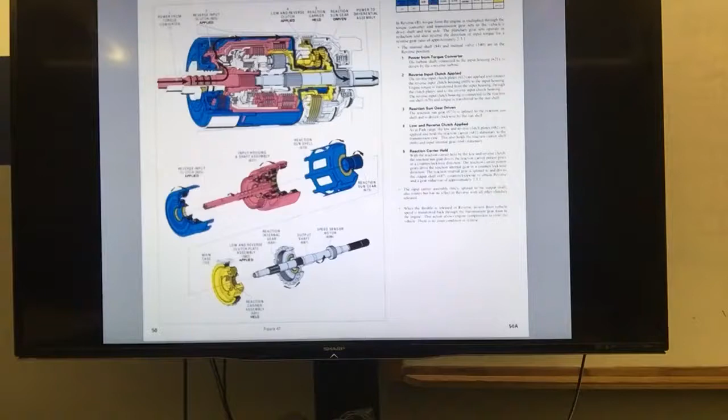So let's put it in reverse. We've moved the manual valve from park through neutral to reverse, and when we did that, we allowed our fluid pressure.

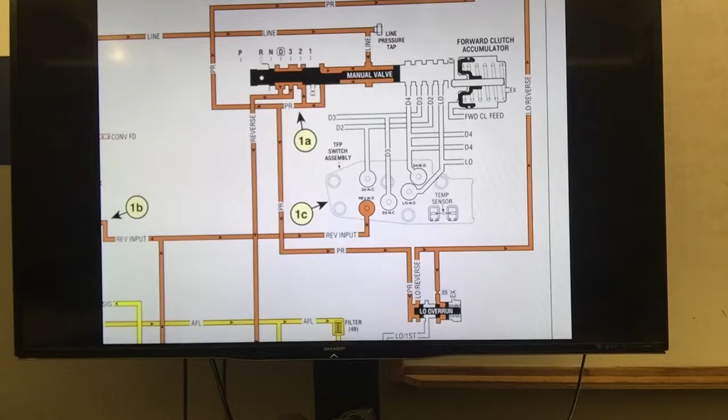PR fluid was already filled, remember, so our low reverse clutch was already applied. That's the one up here in the case. We already have that applied. That was applied in park.

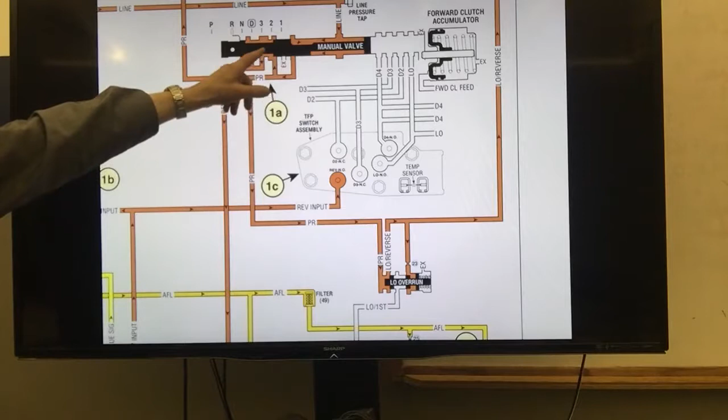When we moved our manual valve over to reverse, indicated by the indicator going over to R, we allowed some of our PR fluid, which is at line pressure because they're all connected together, so it's at whatever line pressure is, which is why the fluid is red still. That goes into our reverse fluid passage.

If you follow reverse fluid, it goes down to the reverse abuse valve, which is seated, spring-loaded in the closed position, so fluid doesn't go past the reverse abuse valve.

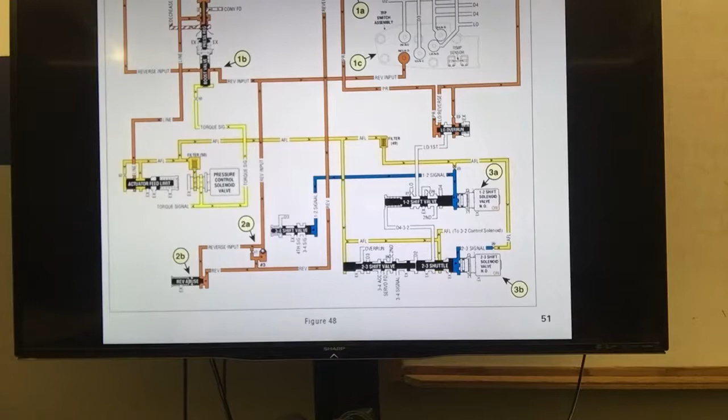It instead goes up to that number 3 check ball you see right there. This check ball is going to seat, so the fluid flows through the number 17 orifice, which slows down the buildup of pressure, and it goes up to our boost valve. What does that do to line pressure? It raises our line pressure because it blocks off the flow into the decrease passage.

We send a little over to our pressure switch assembly to change the state of that hydraulic switch. That switch is normally open, that's what NO means. So when we pressurize it, we close it to ground. The PCM is sending a voltage out on that circuit, and it's going to see the voltage get pulled low. That's how it knows we're in reverse.

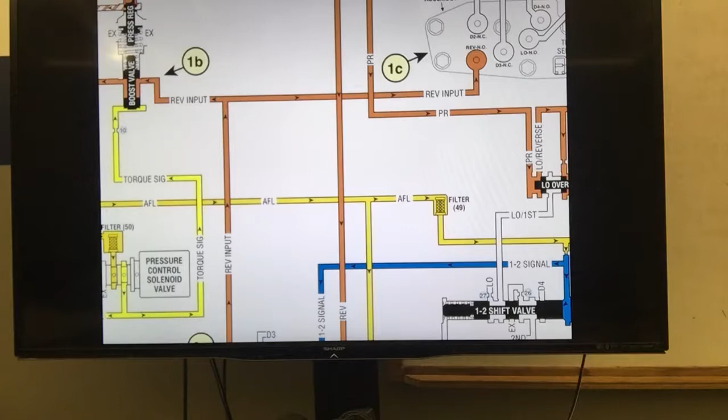We went through our boost valve to boost up our pressure, and then went on up to apply our reverse input clutch. Notice the exhaust, the captured check ball right up here. What's that for? Bleed air out, that's all it is.

And that's usually going to be located in the pump. So when you guys take a look at your pumps, you're going to see these little captured bleed holes or check balls that allow air to bleed.

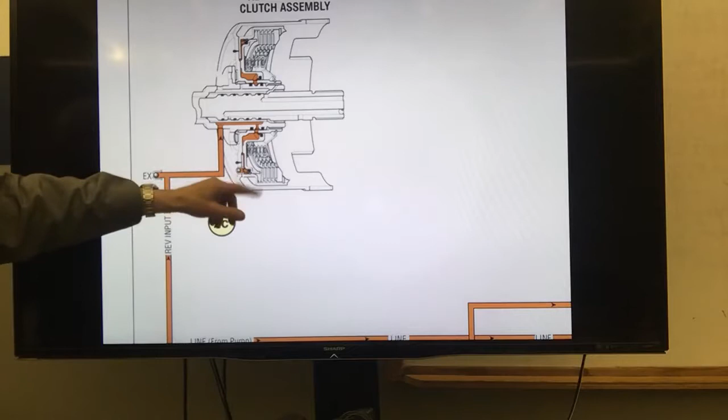And then we go over to our reverse input clutch housing where we can apply our reverse input clutches. That check ball is going to seat. That check ball is there to release any residual pressure when we release the clutch.

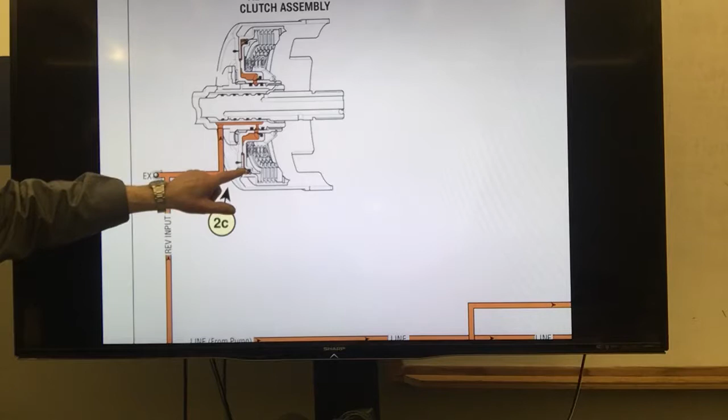Because this thing is rotating with the input shaft and housing assembly, fluid that remains in there after we release the clutch would get thrown out through centrifugal force and partially apply the clutch, which would lead to burning up the clutch over time. That keeps that from happening.

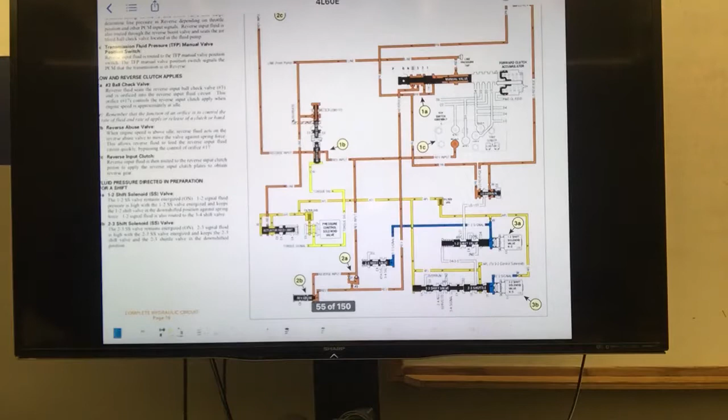Are the solenoids used? Do we need these solenoids? No. Reverse is hydraulically achieved. That's why it's so, reverse boost power. Yeah.

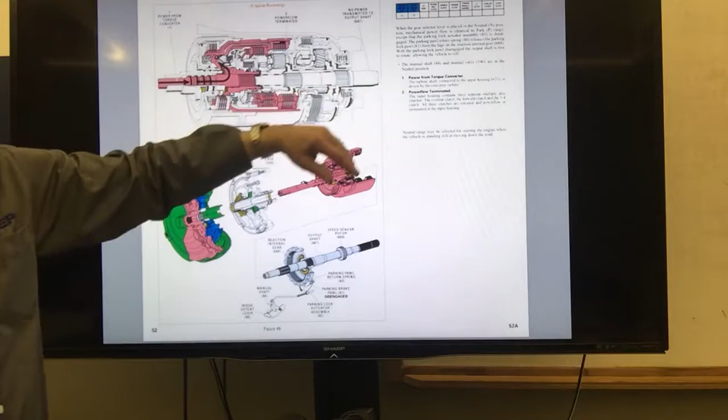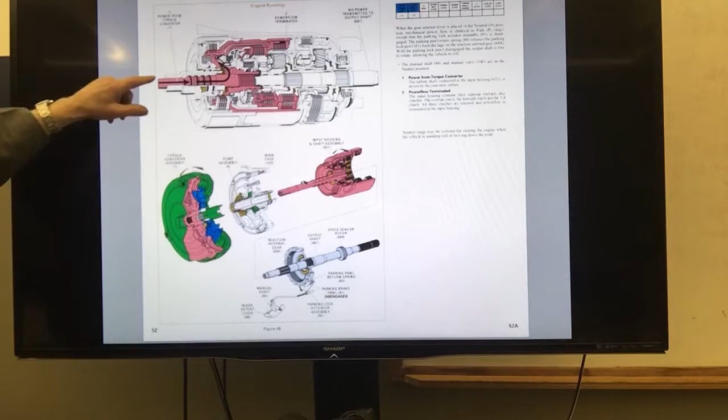Looking at neutral, nothing changed in terms of mechanical power flow. We still got the weight of the vehicle keeping the output shaft from moving, even though our park pawl is no longer applied, so we don't have it locked from turning. Torque is coming in to our input shaft and housing assembly, and just like in park, we're rotating the input shaft and housing assembly in the steels, but nothing else is happening there.

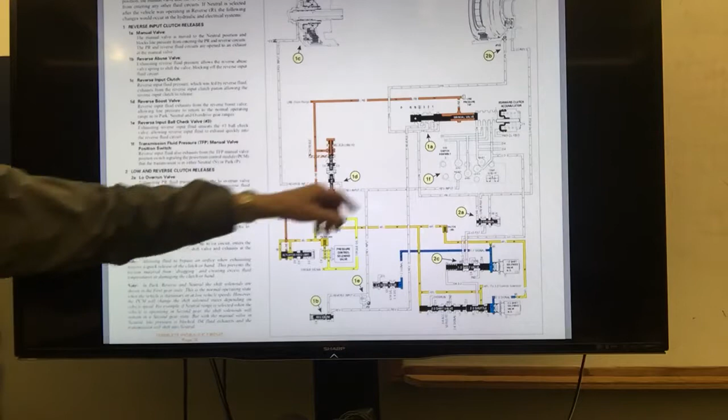Torque stops. Hydraulically, what did change in neutral? I guess that's important. We exhausted the reverse clutch fluid at the manual valve. That's what the arrows backwards mean? Yep. And if you follow those back, you're going to see where they exhaust, and in this case, I thought they were exhausting at the manual valve.

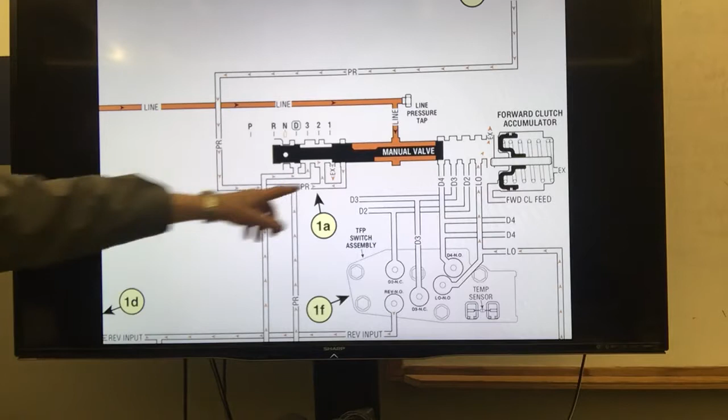But let's look at that for a minute. It has the forward clutch accumulator as an exhaust for it's going out. Or no, that's not that. Yeah, they are exhausting right at the manual valve, you can see that right here at this land. So that fluid is exhausting at the manual valve, and those clutches are being released by spring pressure.

So just to reiterate this part, when we apply the clutches, they are applied by hydraulic pressure. When we release the clutches, they're released by spring pressure on this transmission. On some of the newer transmissions, in the 6Ts and Ls that you're going to be looking at, we're releasing the fluid with spring pressure again, but that release is being assisted by hydraulic pressure.

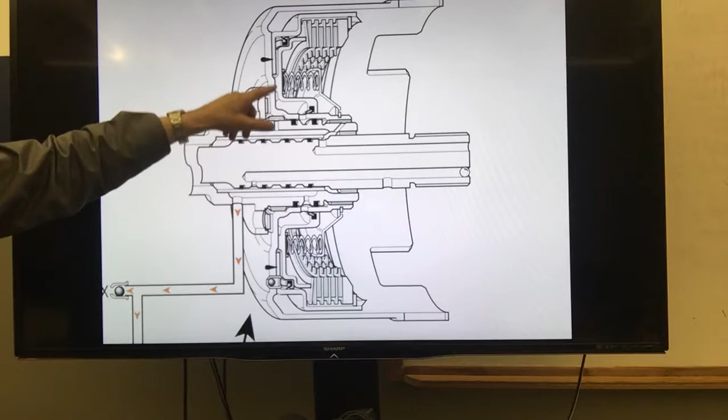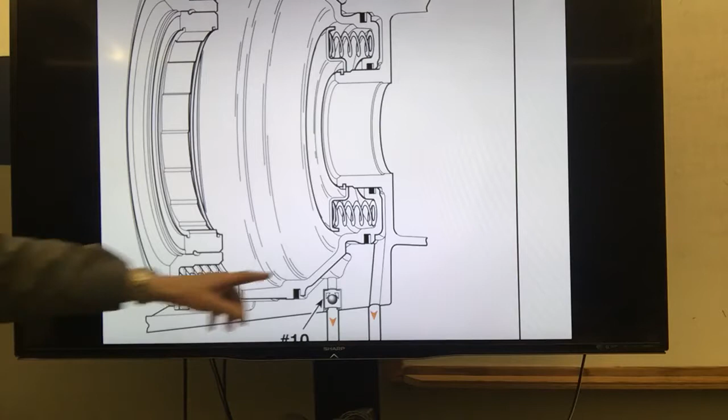So we're actually going to use, besides releasing this fluid pressure, pressure on this side of the piston to help release it, to help control the timing of the release and apply of clutches more accurately. But in this case, it's released by spring pressure, and that's the same thing with our low reverse clutches too, as you can see. The clutches, pressure builds up here to apply, and they're released by spring pressure.

Square cut O-rings on the low reverse clutches. Lip seals on the reverse input clutches. These are two lip seals. Notice the lips always face the pressurized side of a hydraulic circuit.

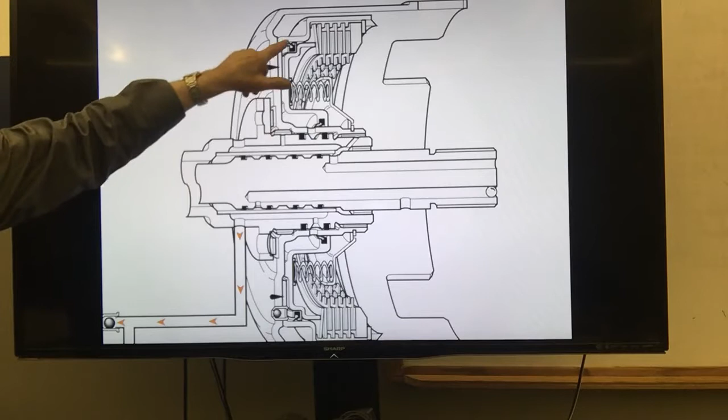That way, when we pressurize this side, the fluid's going to push against the lip and push it tighter against the surface that we're sealing. If you put the seal on backwards, the fluid's just going to flow right past the seal, and you're not going to have any applied.

The solenoids are on in neutral too. Say that again, please. The solenoids are on in neutral too. Yes, they're energized.